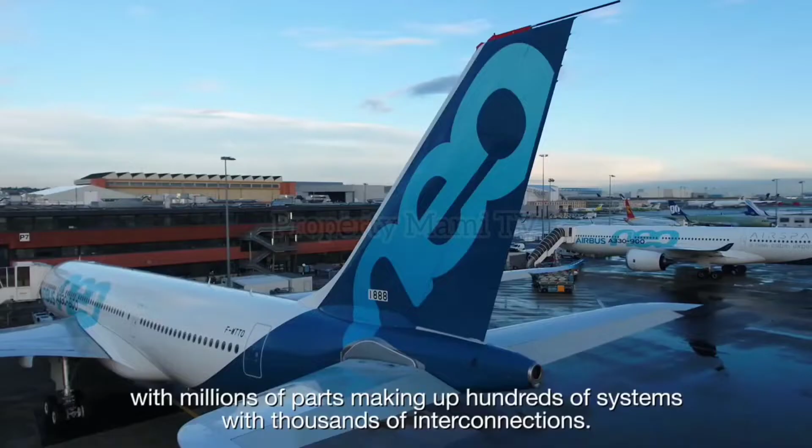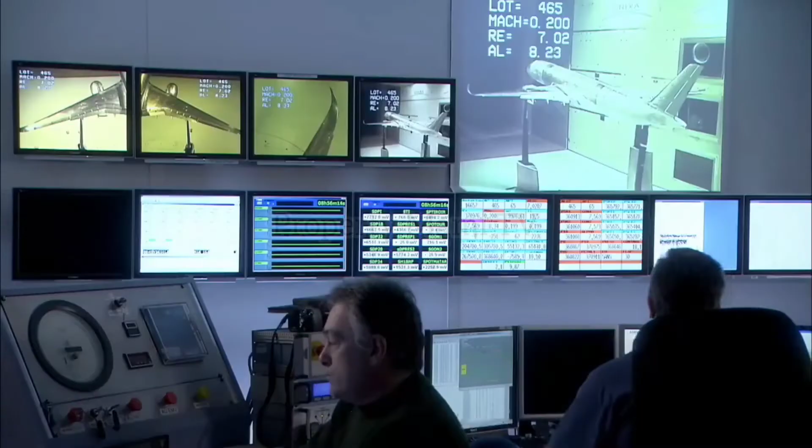Modern aircraft are highly complex machines with millions of parts making up hundreds of systems with thousands of interconnections. The design of a new aircraft involves parts created by computation tools, tested in wind tunnels, and on dedicated test benches, and these are indispensable for the development and certification.

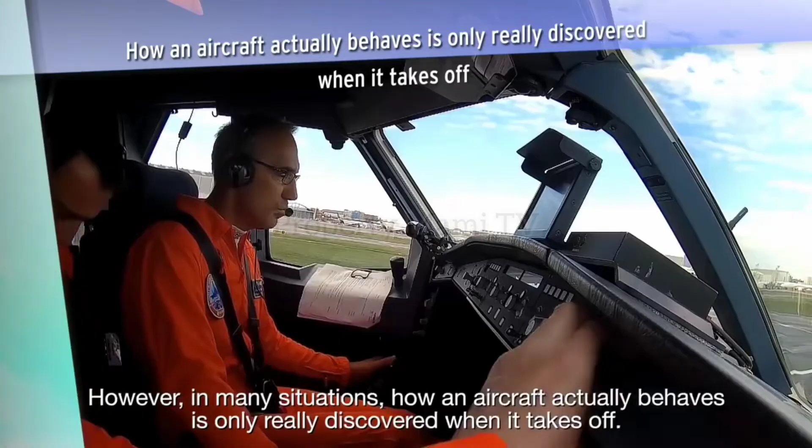After years of careful planning, design adjustments, the integration of new materials and the latest innovations, the aircraft is finally ready to fly. However, in many situations, how an aircraft actually behaves is only really discovered when it takes off. That is why flight tests are essential. Let's look at some examples.

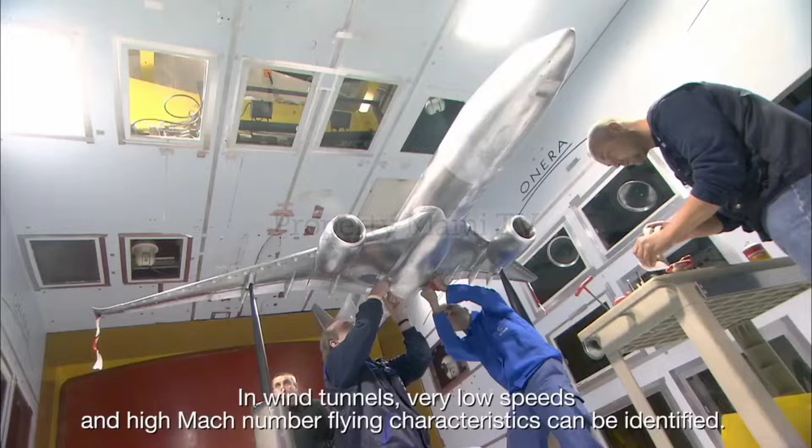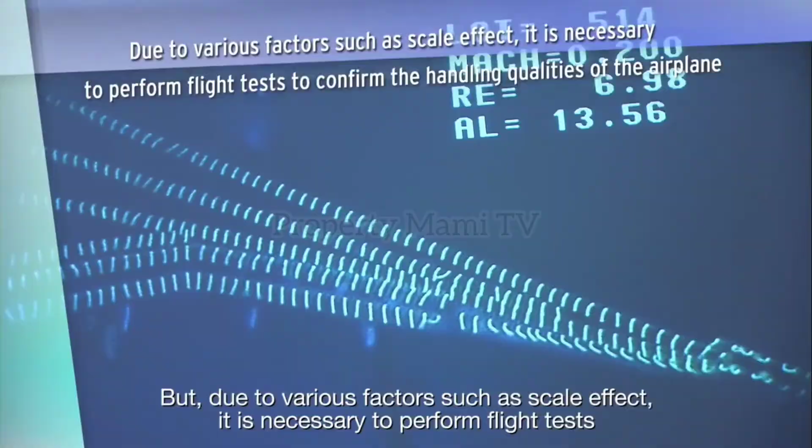Aerodynamic coefficients are not known exactly before flying, and there are sometimes surprises. Final tuning of the flight control laws is carried out in flight, mainly at the limit of the flight domain, such as for the high angle of attack protections.

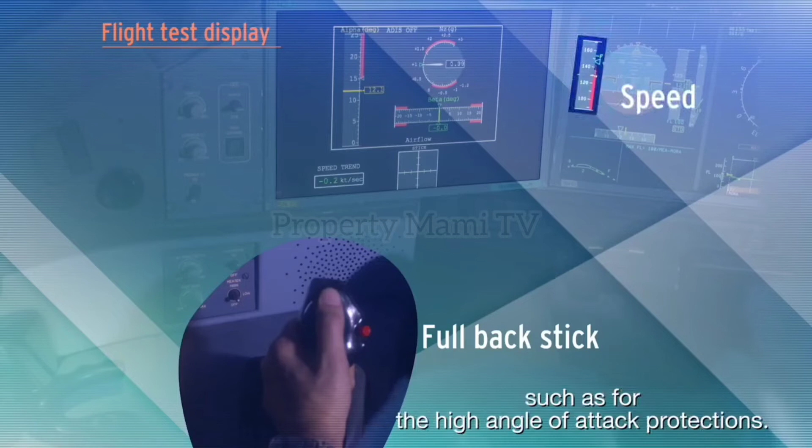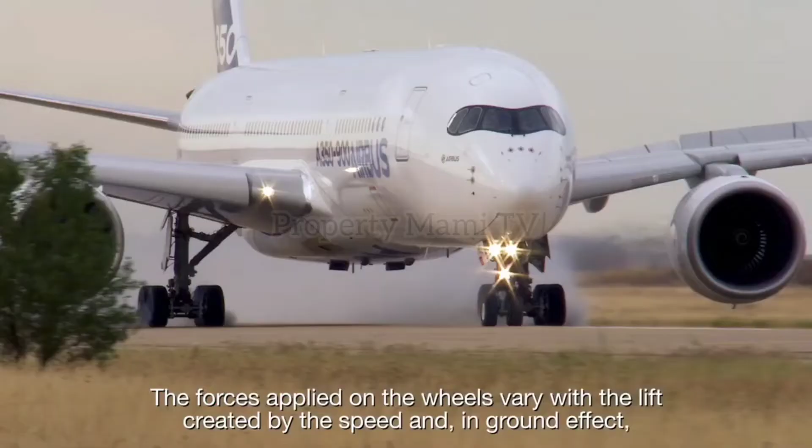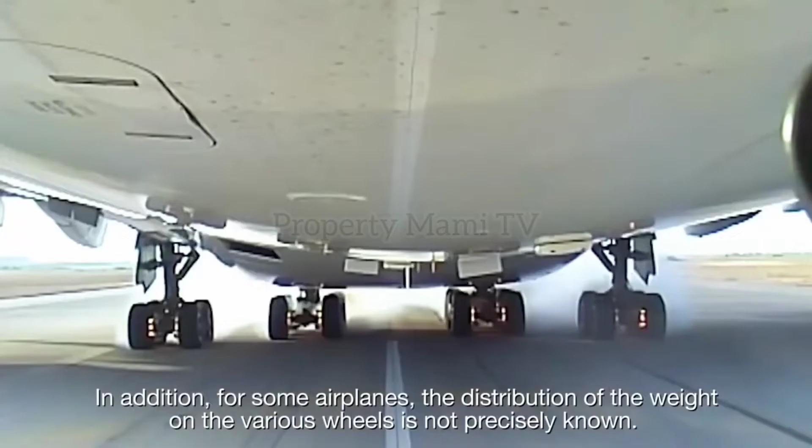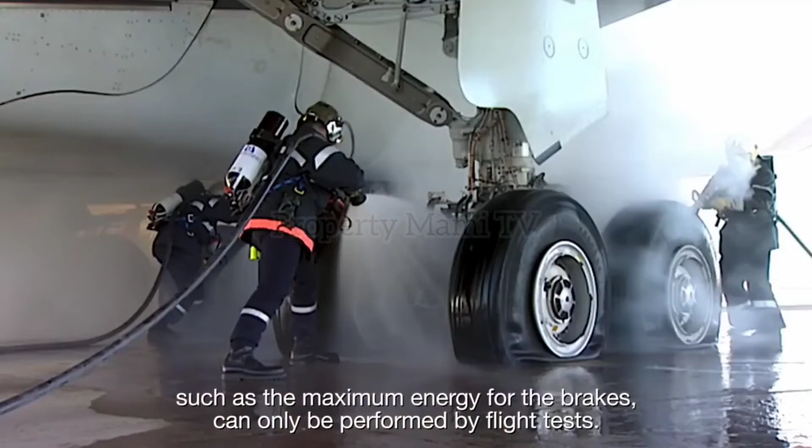The development of the braking system suffers from the same difficulty. The forces applied on the wheels vary with the lift created by the speed, and in ground effect, it is not possible to build a proper computation model. In addition, for some airplanes, the distribution of the weight on the various wheels is not precisely known. Therefore, the tuning and the determination of the performances of the braking system, such as the maximum energy for the brakes, can only be performed by flight tests.

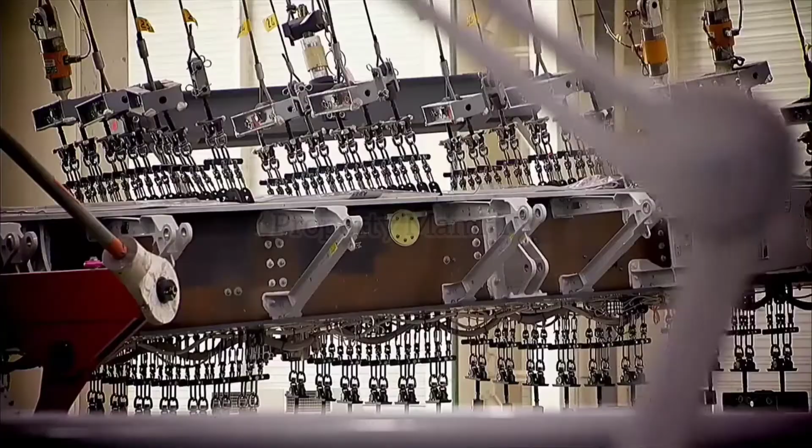The forces on the structure of the airplane may have been underestimated or overestimated during the design phase. They are first confirmed by tests on a static airframe. Then the huge number of load sensors on development aircraft allows the final validation.

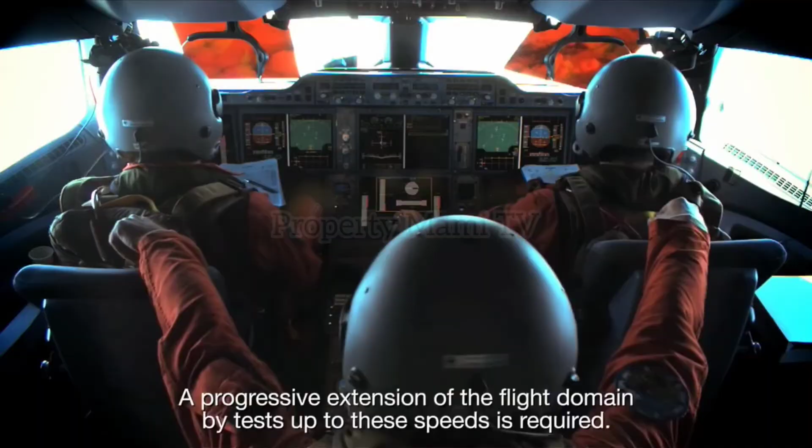Even after computations and ground tests, a risk of flutter in the flight envelope up to VD and MD, which are the design dive speeds used for the structural sizing, cannot be totally excluded. A progressive extension of the flight domain by tests up to these speeds is required.

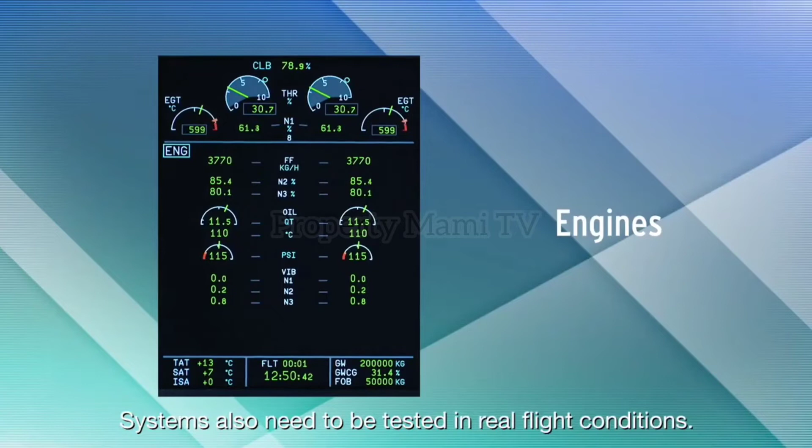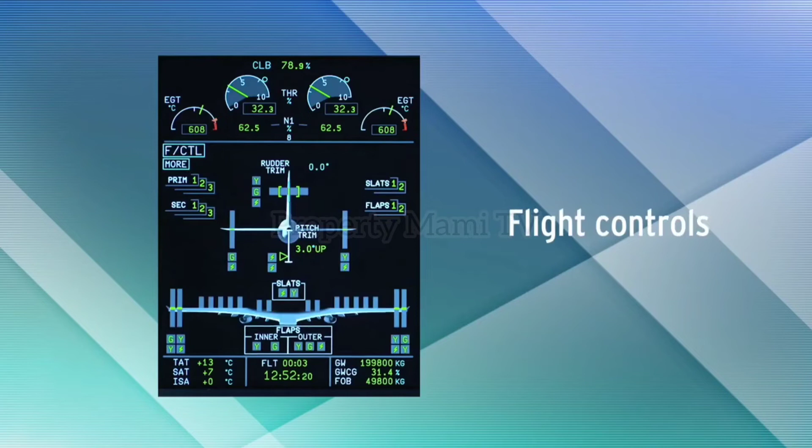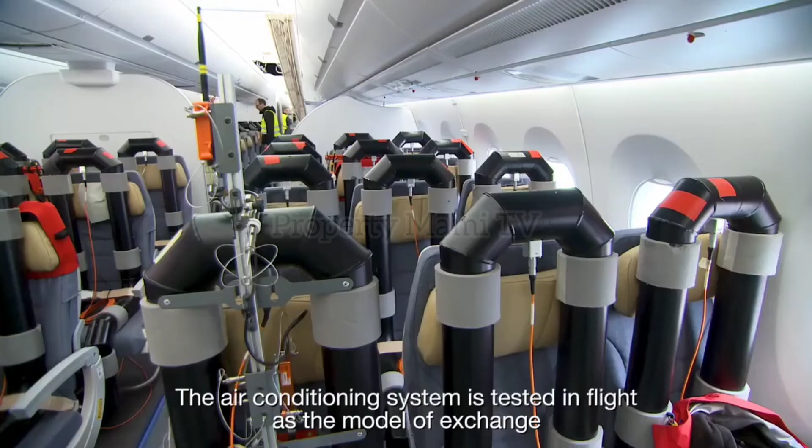Systems also need to be tested in real flight conditions. At the beginning of a program, anomalies may be found due to deficiencies in the design or the installation. The air conditioning system is tested in flight, as the model of exchange with the outside of the fuselage is not sufficiently precise. In addition, the circulation of air inside the cabin is checked in real conditions.

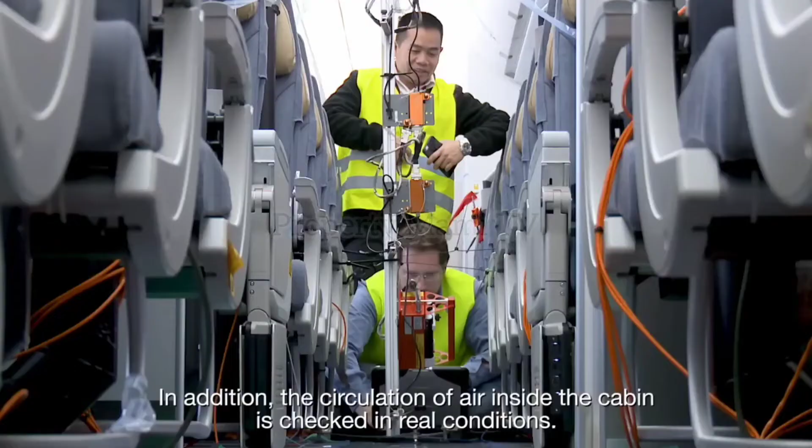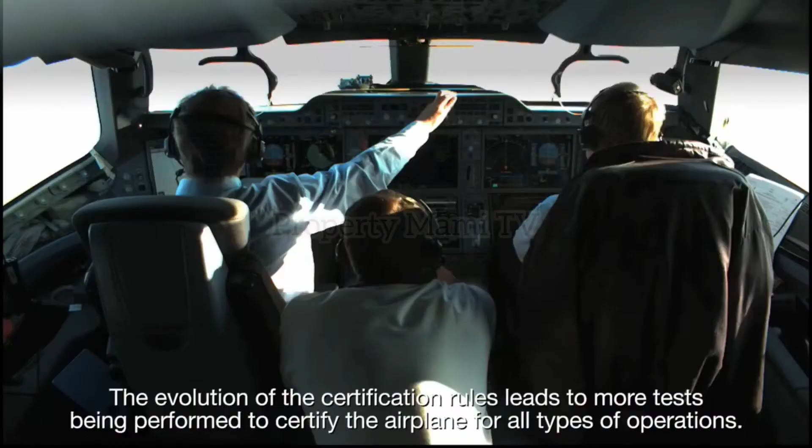We have only reviewed here some of the areas where flight tests are necessary. EASA and FAA regulations impose flight tests in many domains because, very often, it is not possible to guarantee the results by computation or ground tests. The evolution of the certification rules leads to more tests being performed to certify the airplane for all types of operations. ETOPS at entry into service is just one example.

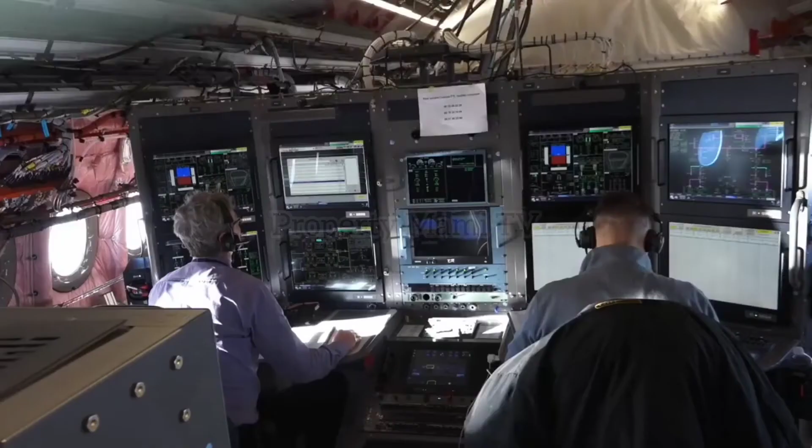In addition, the high complexity of new functions, such as flight control protections, systems to improve comfort, and so on, increases the need for flight test verification. Therefore, the number of flight hours necessary to develop and certify a new aircraft is almost the same as in the past, despite the fact that the engineers have access to more parameters and have more powerful tools for faster tuning. Flight tests are really necessary.